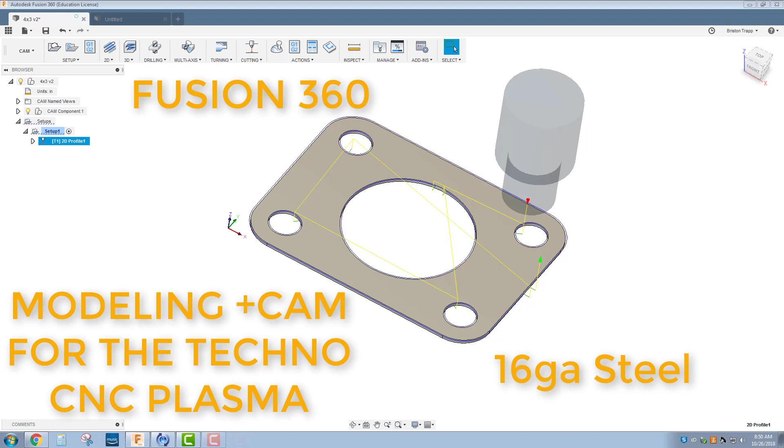Hi, in this quick little tutorial I'm going to show you how to model and program this little widget for the CNC plasma cutter.

Start by saving your work. I'm not going to save this because I don't need to, it's a quick little demo.

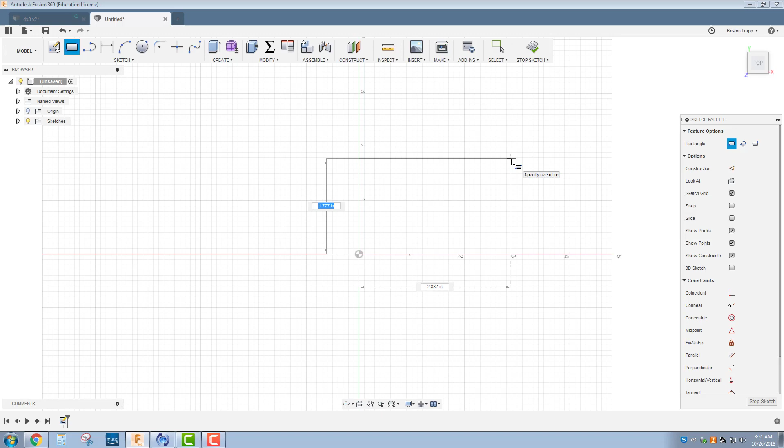You're going to go new sketch, starting on this bottom plane, making sure our Z-axis is pointing up. We're going to start with a rectangle. It doesn't have to be at the origin, but it might as well be. It's going to be 3 inches tall, tab over, 4 inches wide. Enter. It's going to have a circle in the center.

I'm not going to draw it centered right now because I'm going to go back and dimension this circle to be 2 inches, and then it's going to be center to edge at 2, because 4 divided by 2 is halfway, 2 inches, and then this should be 1.5. Going to have a circle right about here.

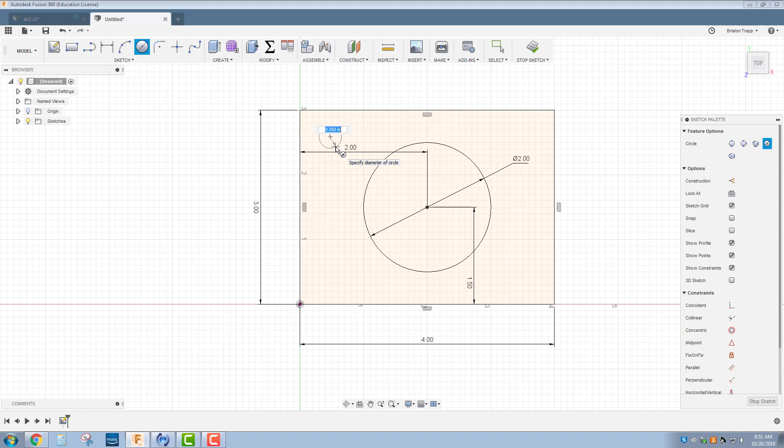That's going to be a 0.5 half-inch diameter, and that circle is going to be from the center to the top edge 0.5, and the center to the left edge 0.5.

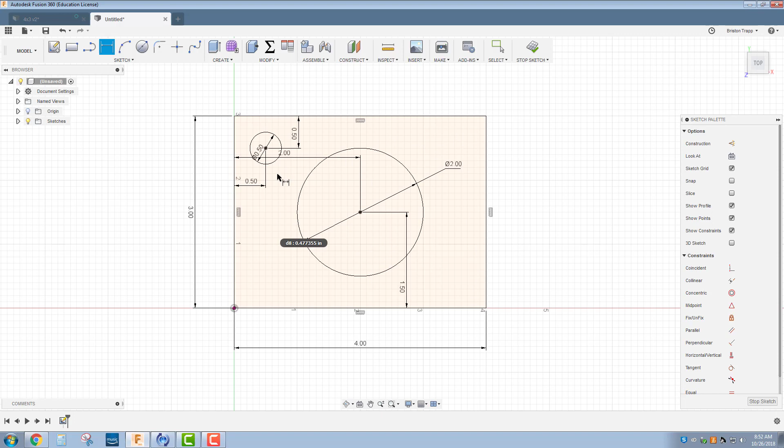And the next step, we need to recreate the 3 holes. You can just basically do those previous steps over, or we can use a mirror tool to mirror our circles.

So I'm going to go line tool, X, turn it to a construction line. I'm going to draw a vertical axis. Once again, L for line tool, I'm going to press X. Construction line is on. This construction line won't interfere with any other geometry, just kind of for reference.

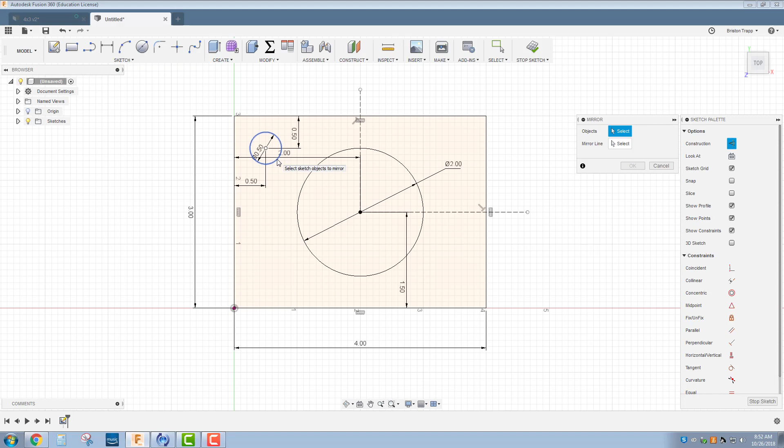Sketch, mirror, click on our circle, click on our mirror line. So there's that, and then right click, repeat mirror, click on that one, click on that one, select the other mirror line, click OK. And what's nice, if we need to make changes, it will automatically update all of the other holes.

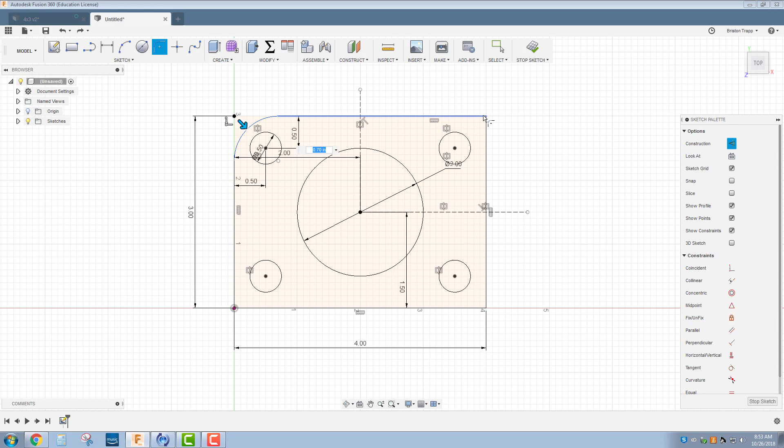Next step in the 2D workspace is going to be a fillet for the 4 corners, and that's going to be a radius of 0.5, half-inch radius. Enter. E to extrude.

I'm going to bring this out to a 3D view. I'm going to pull it to get it started, and that thickness is 0.06, approximately a 16 gauge, approximately a 16th of an inch. Enter.

That is it for the 3D model for our widget. We're going to hop over into the CAM workspace and set up our part.

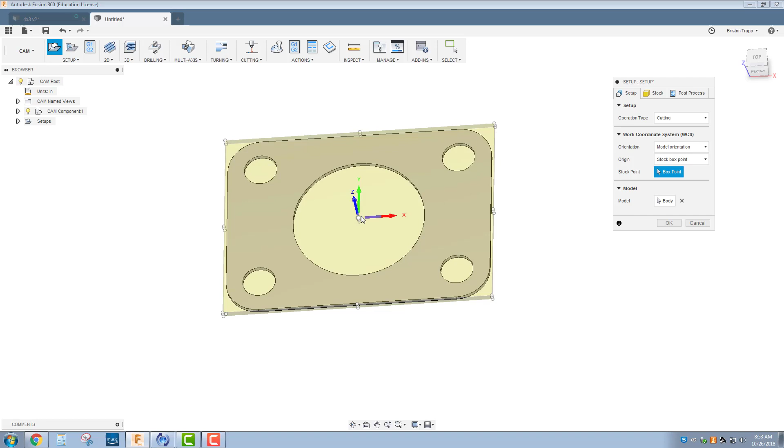First thing we need to do is do a new setup. Change the operation type to cutting. Our work coordinate system defaults to the middle, but we want to pick this top, bottom, left corner, or X to the right, Z up, and Y going away in this direction.

Stock tab. We want to add 0.1 to the side and 0 to the top. That gives us enough border around our part for our stock so we don't cut into something else and not waste material. And that gives us our overall XYZ stock size for our dimensional stock right here, 4.2 by 3.2.

Post-process, you can type in a program name or number. I'll just call this 4 by 3 with my initials, and then the comment's going to be V1 because it's version 1. Click OK. We now have our setup.

Next thing we need to do, you might have already done this before, but we're going to go ahead and do it a little different ways. Set up a cutting tool for the plasma cutter.

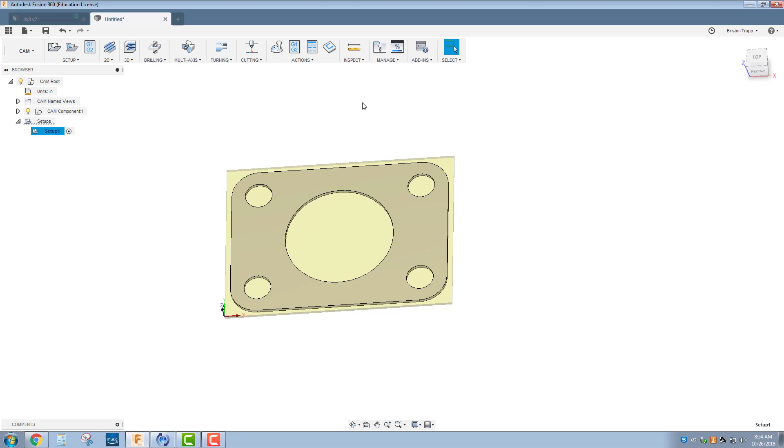Up here on our tool library, we're going to click on that. And then over here in the top right hand corner, we have a new cutting tool for a water jet, laser, or plasma. Going to go to general.

We're going to call this the 40 amp plasma. Don't worry about the vendor, product ID, and links. That's a little overkill for what we're doing.

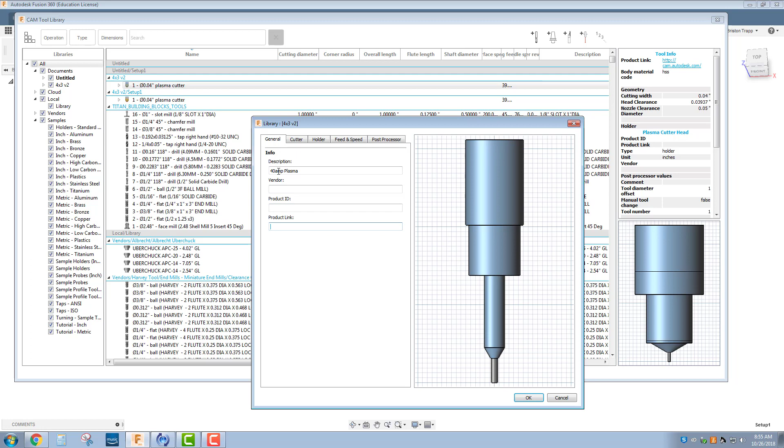Cutter is going to be a plasma cutter. Changes kind of the tool holder. Ours doesn't exactly look like this, but it really doesn't matter.

Our kerf width is going to be 0.037. And let's give it a nozzle clearance diameter of 0.05. This is all in inches. Holder, this doesn't matter. Feeds and speeds.

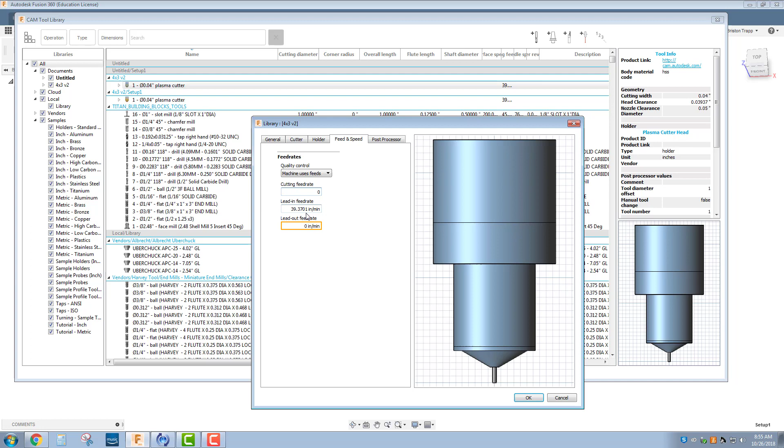Our machine is going to use feeds and speeds. Our default cutting feed rates, let's go ahead and just change this to actually 0. This will force us to change it later. I don't even know if it lets me do 0. We'll see. Let's go 1.

Because we will need to change our feeds and speeds depending on the thickness of material that we're cutting. If we're cutting thick metal, we're going to go slower. If we're cutting thin metal, we can go a little bit faster. And those are all set up with templates out in the shop as far as what your feed rates are for certain thicknesses of material. By putting it at 1, it definitely lets you know that you need to make a change. Going to click on our post processor.

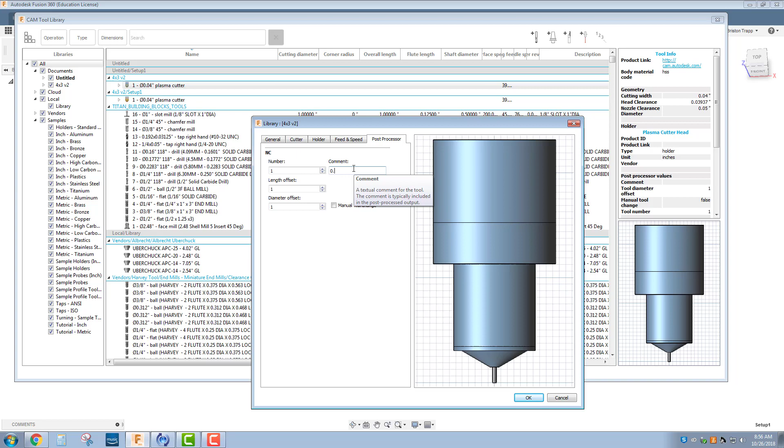This is going to be tool number 1, and comment is going to be 0.037 40 amps. If you jump up to a 60 amp cutting nozzle and you're cutting thicker metal, the width of your kerf is going to increase. And this is close enough.

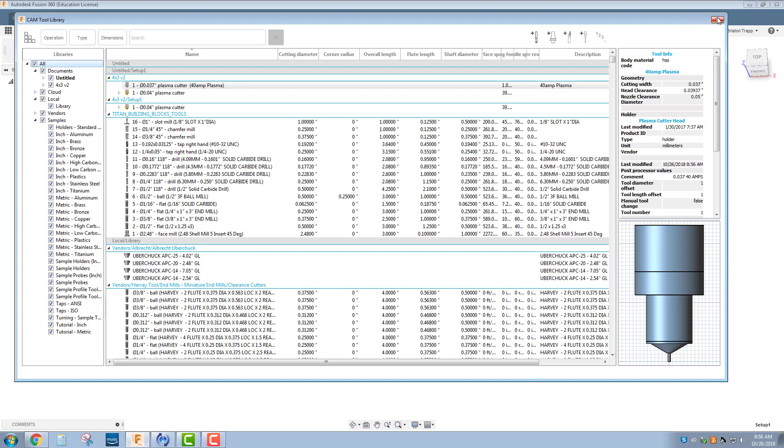Going to click OK. So we now have our 0.037 plasma cutter saved in our tool library. You can save this locally or within the cloud. I'm going to close that. Cutting operation up here on the top, 2D profile. Select our tool, going to find that tool right here that I just created.

You can take this tool, duplicate it, copy it into your cloud library, or you can just copy it from a previous part. There's a lot of different ways to do it. So there's our 40 amp plasma. You're going to click OK.

This is where we're going to change our feed rate. So cutting feed rate 150. Our lead in's typically going to be a little bit slower, so we'll go 130, and lead out can be 150. These can all be 150, but we'll just kind of learn the concept that our lead ins, where it's piercing, we maybe go a little bit slower when we're making that little lead in pierce cut. Cutting mode is going to be auto.

Geometry is going to be this top surface. That gives us our direction that the tool is going to be on. So our tool is going to be on the outside of our selected geometry for the outside, and then inside or here. And tabs, don't really need tabs for this part since it's big enough.

It's not going to fall through the slats, but for the sake of learning, we're going to add tabs by points. Typically, I like to add my points or my tabs manually with points. Tab position, we're going to put 1 tab here and 1 tab here, and this will allow us to break this part off. You don't need multiple tabs.

If you put tabs all the way around this, you're not going to be able to snap it off from the sheet. Our tab width for cutting this thickness of metal at this amp and feed rate is going to be 0.13 inches for our tab width. Heights, there's nothing to worry about here. These default values are fine.

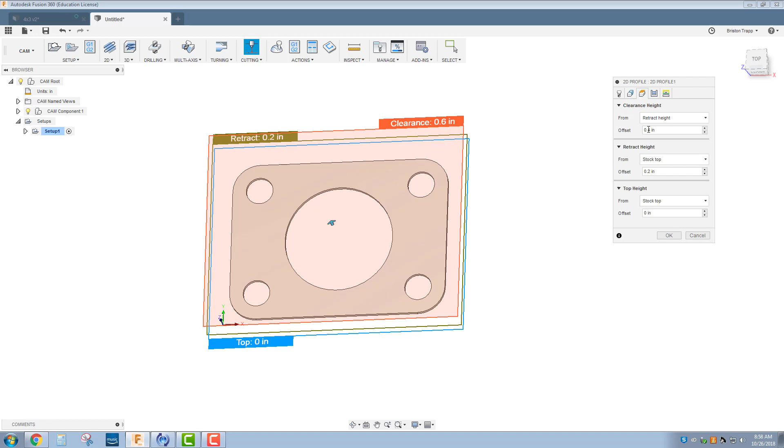Passes, we're going to change our compensation type to in computer, so it creates a G code based off of the diameter of our tool, which is 0.037. And that's fine for this tab. And our linking, we're going to change our lead-in sweep angle to 90 degrees.

And our lead-in distance can actually be a little bit shorter. We're going to go 0.1 for our lead-in distance. If your lead-in distance is really long, sometimes you have a difficult time, Fusion has a difficult time making a tool path inside a small hole.

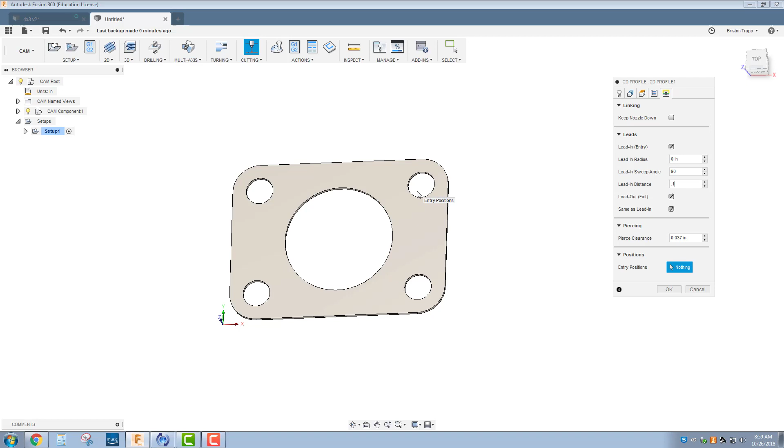This hole is big enough so it wouldn't be a problem, but typically if you're not getting a tool path in a small feature in your part, it's because your lead-in lengths are too long. So 0.1 is typically about as small as we need to go, and then our piercing clearance is going to be the nozzle diameter. This could also be maybe that 0.05.

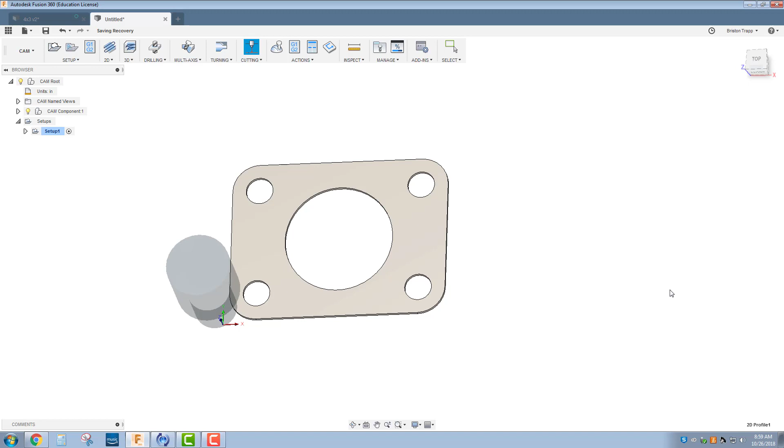And that's it for our cutting operations. We see here we have where it starts in. It's going to cut out this hole, then it's going to link over, and then cut out this one, and then this one, and this one. And why am I telling you this? Because we can just watch the simulation.

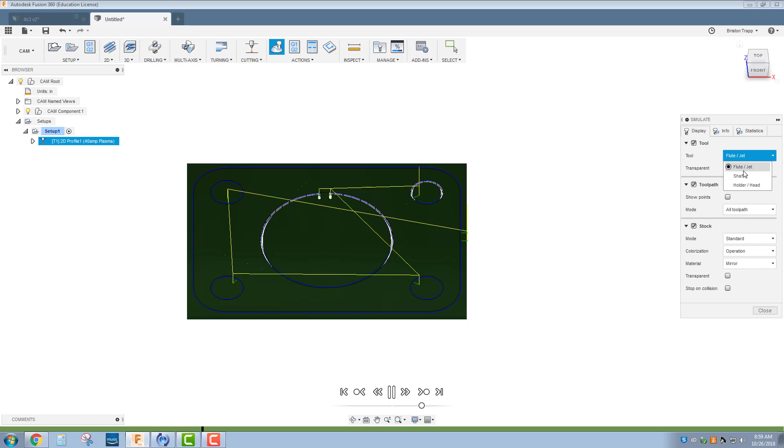Notice I have my tools changed to flute. If you go to holder, this kind of blocks it. It's really not necessary for our simulation. There's definitely not going to be any collisions. This kind of gives you a little more accurate view of what's going on.

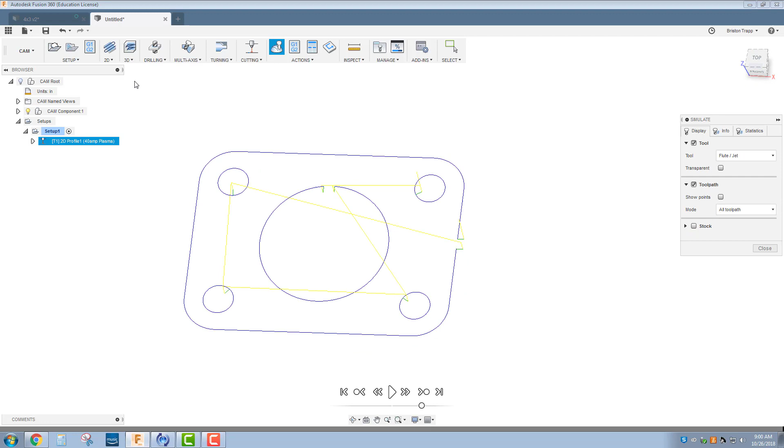We can see our lead ins, we can see our tab and our lead out, and you can also toggle off between your model on and model off. You can't really see anything because it's exactly the same size. You can turn off your stock, and then you can watch your simulation again. Can't really see much with the stock off. Typically I like to have my model off and my stock on for the simulation.

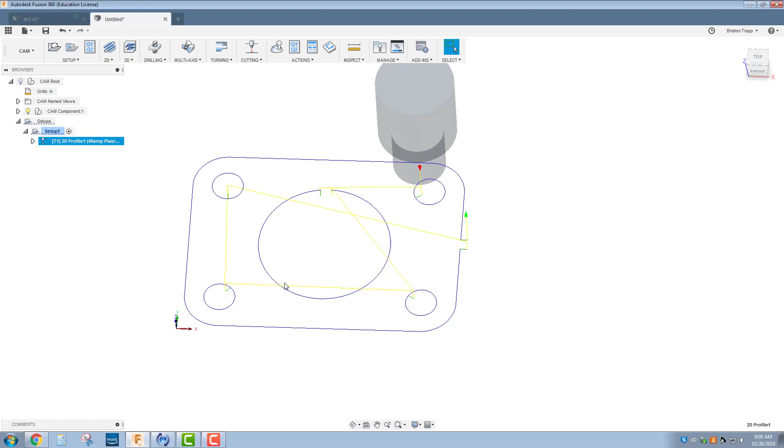So that looks good. Hopefully you're saving frequently. And the final step is going to be post-processing. We're going to take this visual information and Fusion's going to turn it into G-code for our CNC plasma cutter via a post-processor. So find the G1, G2 button.

Make sure you have your setup 1 selected. It's going to have your tool path underneath. We're going to turn our model back on.

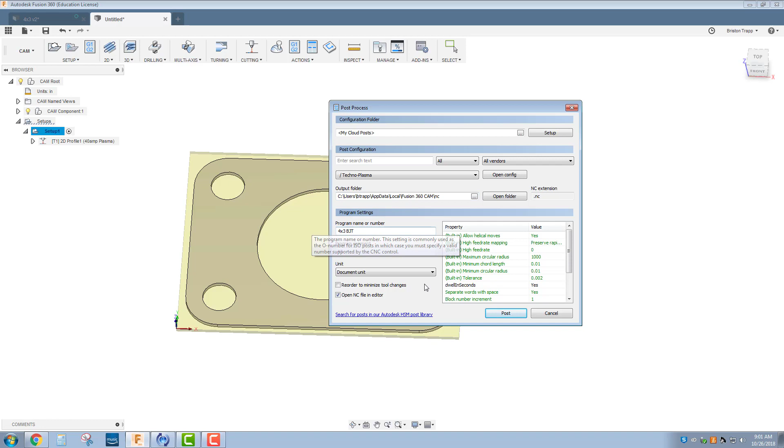Post-process. Go to setup, make sure you're using your cloud post because that's where your Techno CNC plasma cutter post processor is stored. Make sure you got the /Techno plasma post processor, final chance for a program name or number and a version number, and hit post. This is where you will save it on your flash drive.

And take it out to the CNC plasma cutter. Thank you. Good luck.